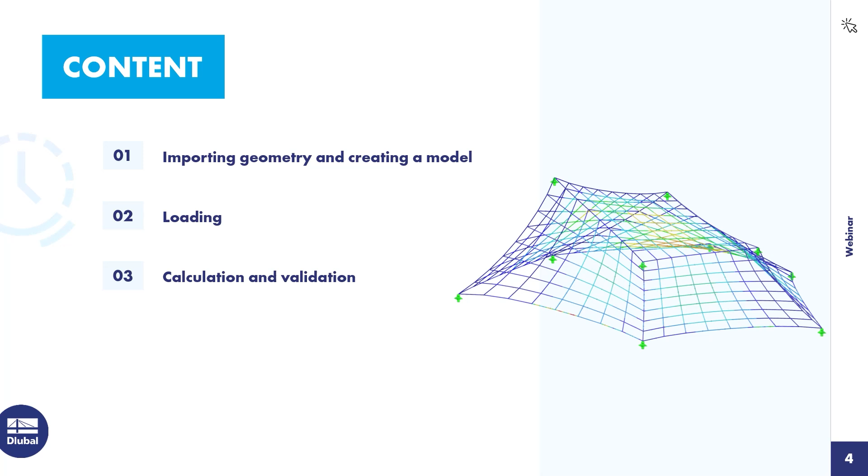I'll show you the principles with a simple cable net structure, and later we'll look at a more complex structure shown on the right. Imagine I'm a civil engineer and an architect comes to me and says: I designed this cable net structure, which is supposed to be a climbing frame for children, and I ask you to construct this. So your task is to find the right pre-stresses for this cable net structure so that the shape and geometry stays put and maintains the shape like the architect wants it to be, as he designed it. So this is the scope, let's go into the software and see how to do this.

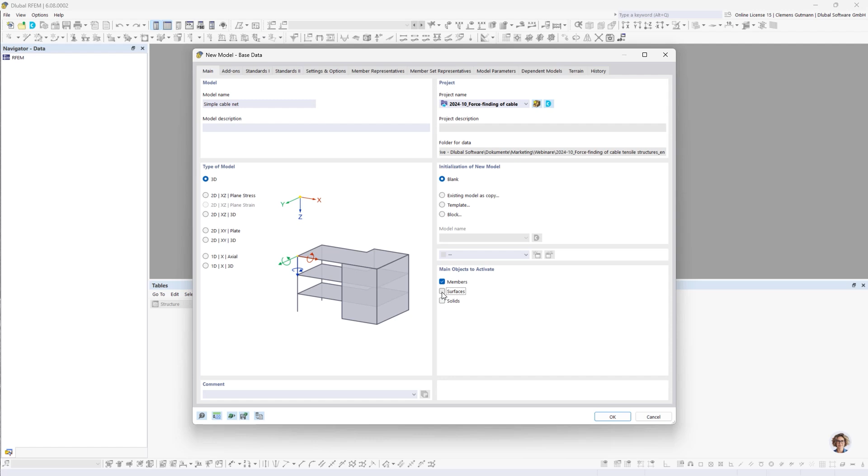First, we need to create a new model. I'm going to name it simple cable net. I'll deactivate surfaces and solids as I don't need them, and that way the data navigator becomes a little bit clearer.

Additionally, of course, we need the add-on form finding.

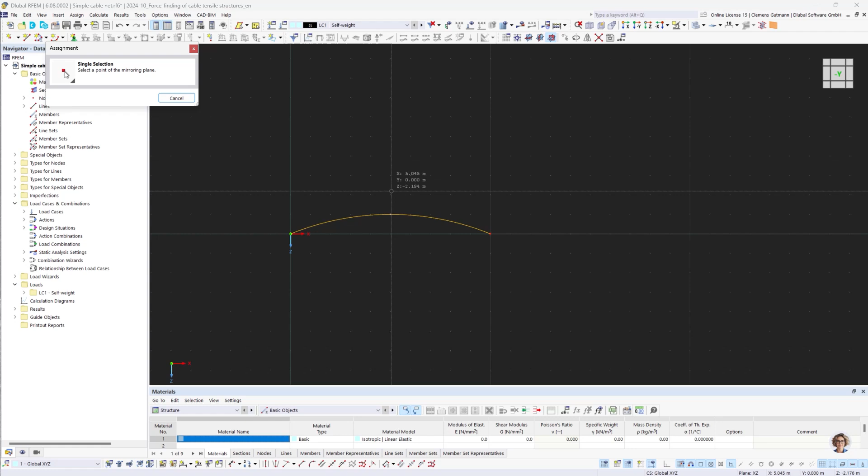We then proceed with the modeling. My simple cable net shall consist of an arch with a gauge of 1 meter and a width of 10 meters. I then want to mirror this about the XY plane and the center point one time. Sorry, made a mistake, forgot to check the copy option.

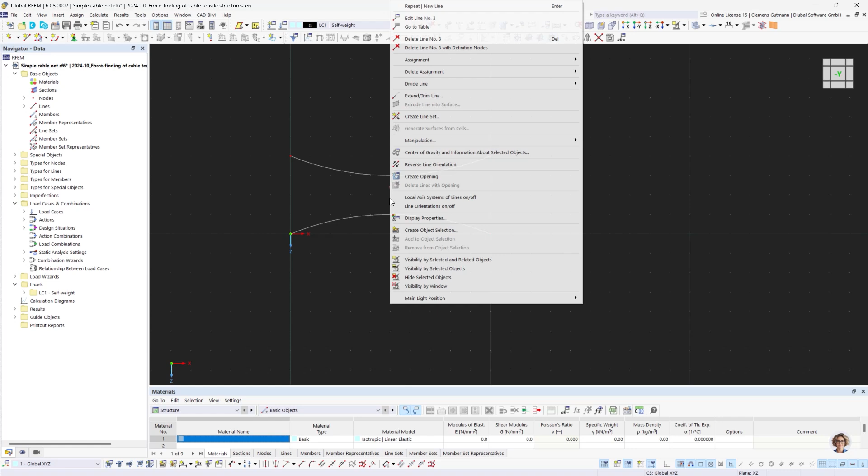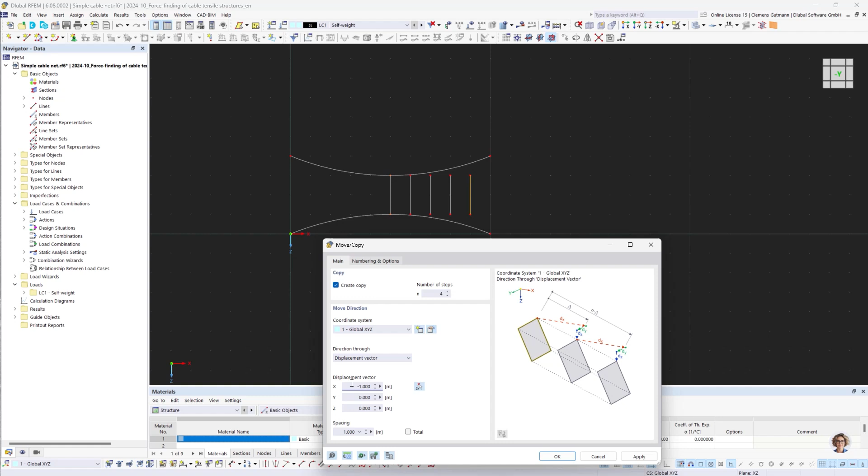These two arcs I want to connect by straight lines. And those straight lines I want to copy with a distance of 1 meter in either direction, so 1, 2, 3, 4 times. One meter, hit apply, and then again in the other direction.

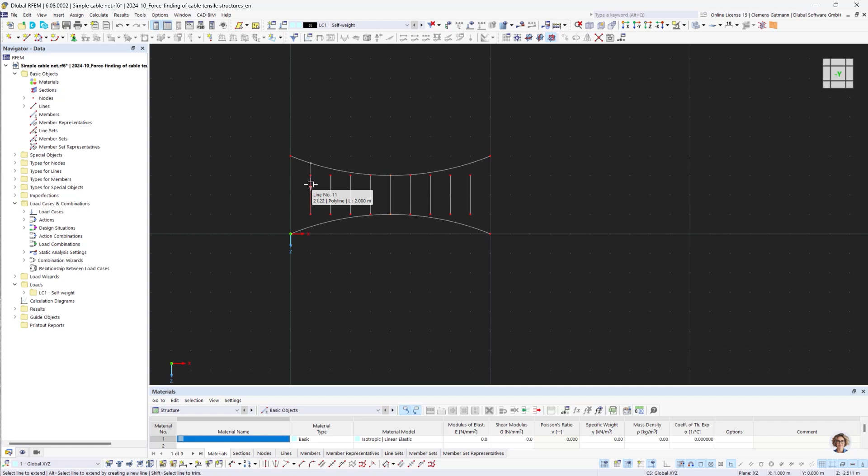I want to connect those straight lines now to the arches, and there's a quite handy way to do this: the extend graphically command, which hasn't been available too long in the software. There's the opposite command as well, trim graphically, which does the same but the other way around. If I click on it and hover over the end of a line, it automatically searches for other lines in that plane and creates a preview where an intersection has been found. If you click on it, the intersection is made and the line is extended to the other line. That way, complex intersections can be made quite easily and fast.

I want to connect all those lines, so I get small chunks between the straight lines, and I proceed with the material. I want to use a cable material from Fatzer today.

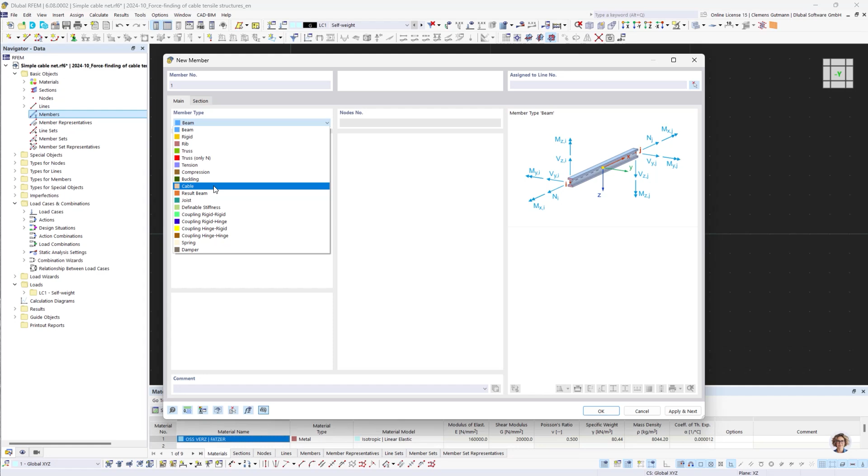Okay, and a section, a round bar section with 10 millimeters diameter. I then want to assign this section to all the lines I've created, and of course the member type is supposed to be cable. Select all lines. Okay. And okay. The colorful squares you see is an indicator that member representatives have been found.

This is quite a handy feature if you want to design a structure. So the software searches for members that have the same property and the same shape and groups them together in a so-called member representative. But since I do not want to perform a design today and every member is different, I deactivate this in the display navigator.

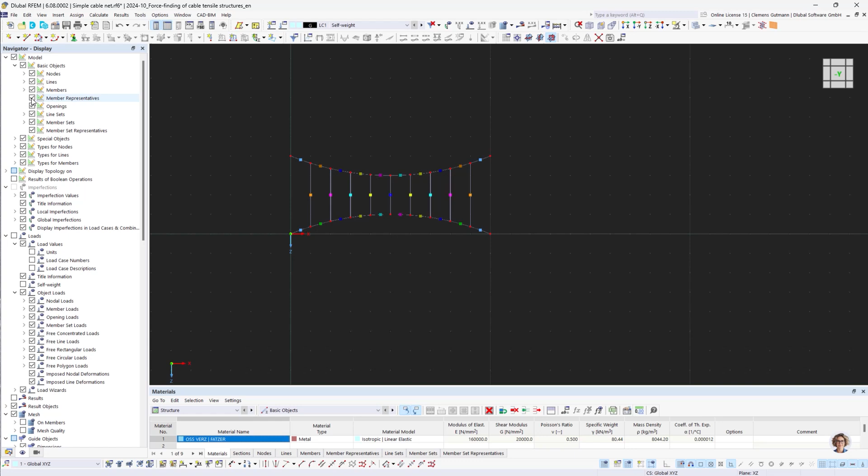Next step would be to assign a nodal support to the corners. Let's make them a little bit bigger.

Okay, and now we can define our load cases. Today I do not want to use the self-weight for this model, but just a pre-stress load case.

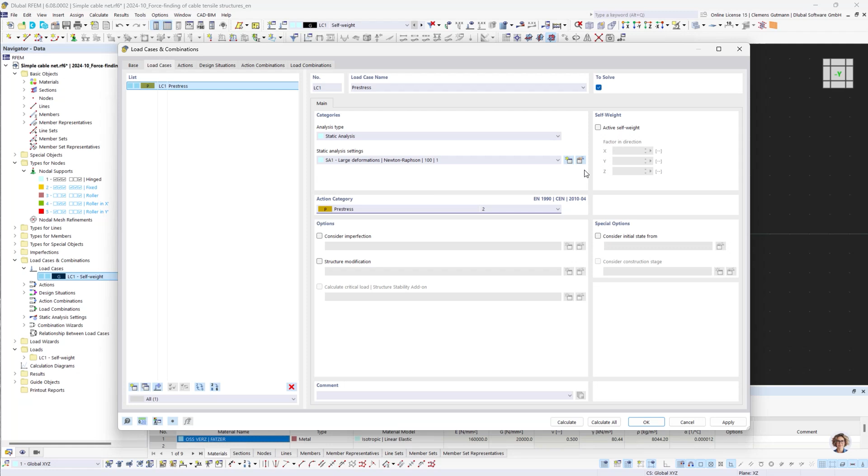And there's another setting that we have to adjust, and that is in the static analysis settings. So I'm going to edit those. And if you activate the form finding add-on, you get a new tab for the add-on here.

There are 3 options that I'm going to explain to you very quickly. The number of iterations for loading pre-stress determines how often the form finding solver tries to find a solution for the boundary conditions that you gave to him.

So if you define form finding loads, either force loads or geometry related loads, those are boundary conditions for the form finding solver, and he tries to find a solution that matches the boundary conditions the best.

Usually if you perform form finding, 15 is a good number, but since we want to do a force finding and we want to get a very exact result, I'm going to increase this number to 60. Depending on what model you want to force find, you have to try out yourself what number fits best. At a certain point, if you increase the number further, it will not result in a better result.

The second option is the speed of convergence. This is a setting where you can influence the stiffness of the members and the membranes. So this is especially interesting if you have structures with large deformations during the form finding process.

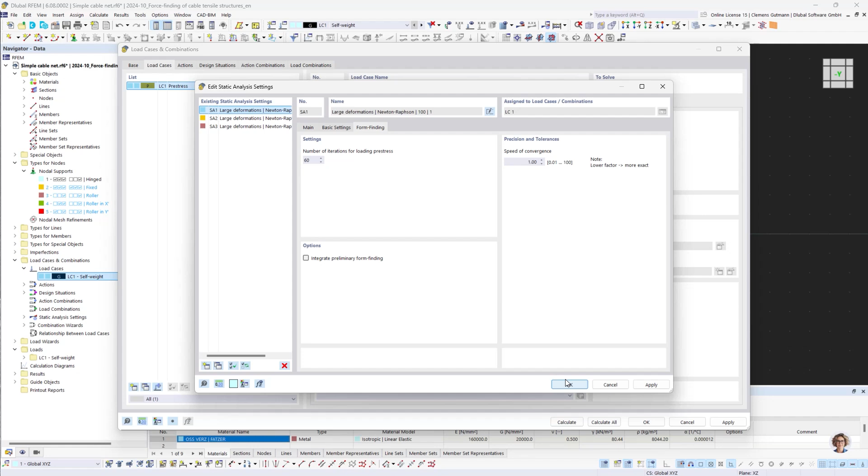Since we do not want any deformations, those last two options are not for us today, but I still wanted to explain them to you. We click OK, and again OK.

Now we can define our member loads, and for this I'm going to use the load type form finding, of course. At first I want to create an average force in member definition for the member in the center.

It's going to be 1 kilonewton, but as you may know, with form finding, it's actually irrelevant what size you pick. What matters is the ratio in the different directions. So you could also pick 10 or 0.1 or 5, whatever you like. It's just a reference for the form finding solver to find the pre-stress level.

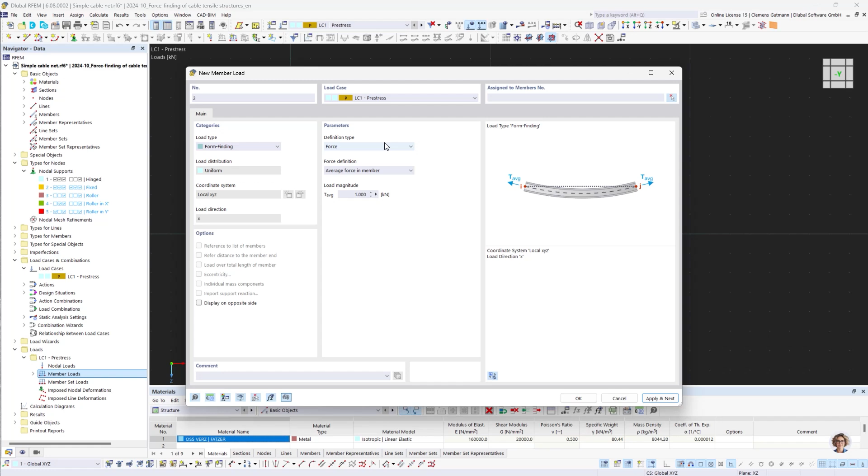Okay, we click apply and next. And to all other members, I want to assign a geometric form finding load with 100% length. So I want that all those members maintain their length. And I'm going to assign those to all other members. Okay, and okay.

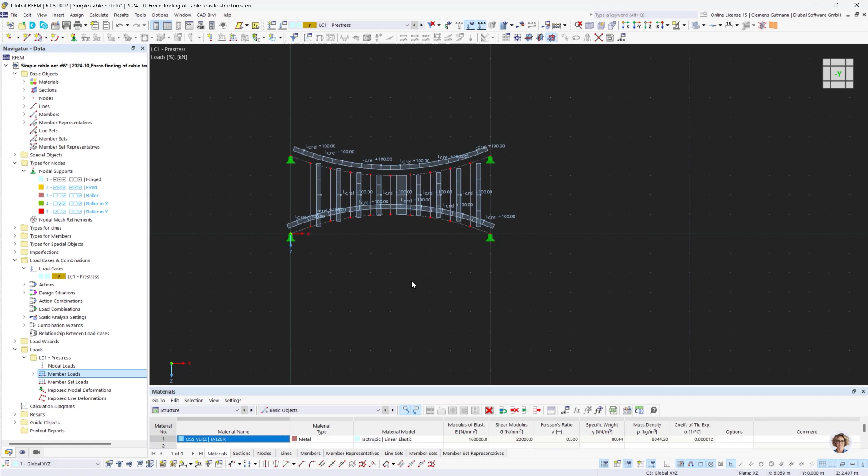Now we are ready to calculate this load case.

Let's have a look at the result. The result is not as good as I hoped, and there's a specific reason for this.

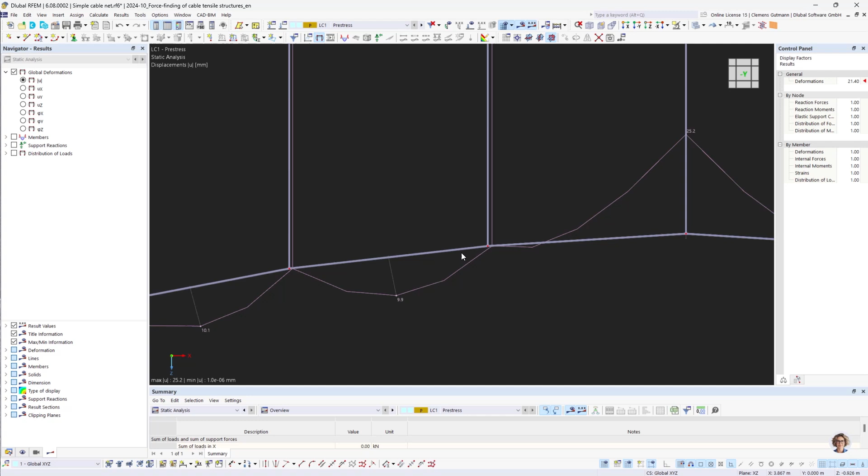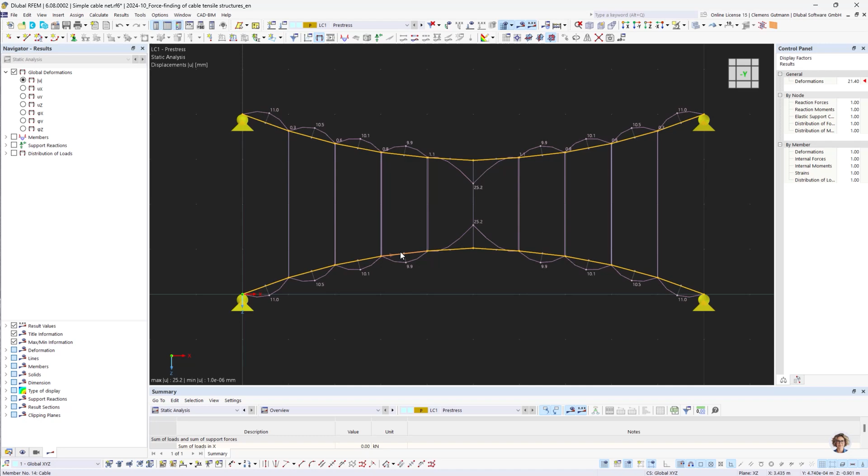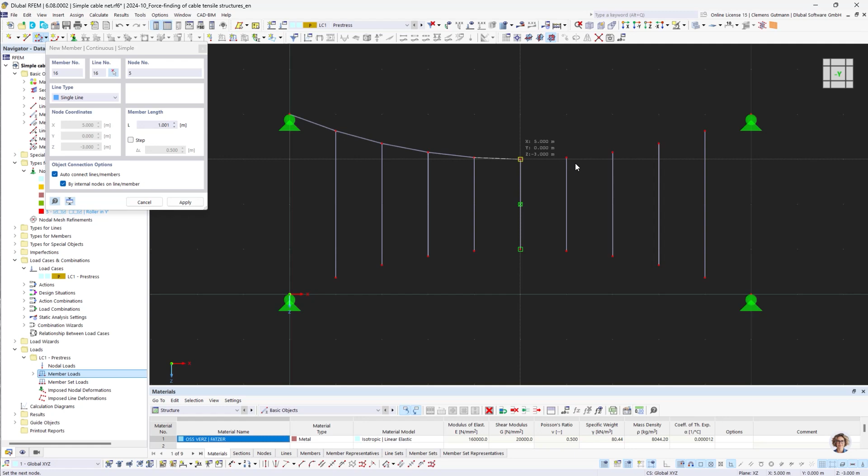To correct this, I'm going to delete those arches and connect the points with a straight member. I'll select continuous and tick all the nodes. And for the bottom, I'll mirror this again.

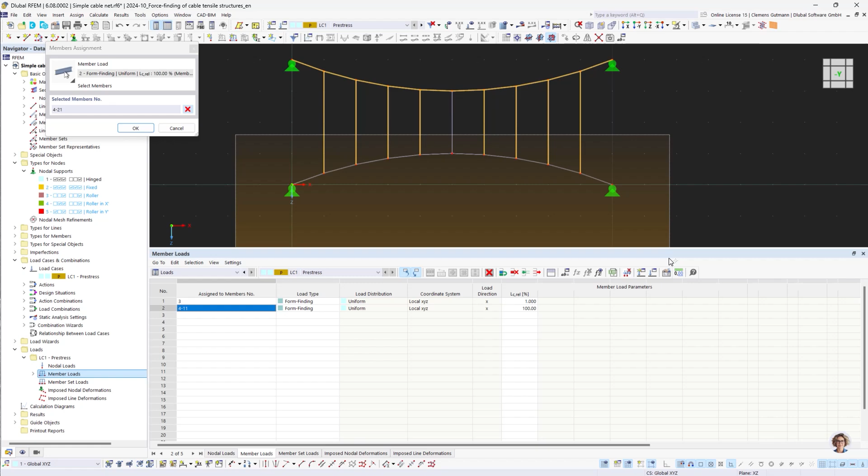Before we can calculate, I need to assign the loads again to the new members. Let's try this one more time.

Now we get the result that we've expected. There's almost no deformation, it's negligibly small, and we get a normal force layout that is reasonable. We have the 1 kilonewton in the middle, and like a hanging bridge, a bigger normal force in the arched cable members.

To show you that this is a real result and that the form finding solver did not imagine something, I want to validate this result.

In order to do that, I wrote myself a little Python script that reads the result data of load case 1. Then I filter the result data to get the internal normal force, and I want to assign those normal forces as an initial pre-stress to the members in load case number 2.

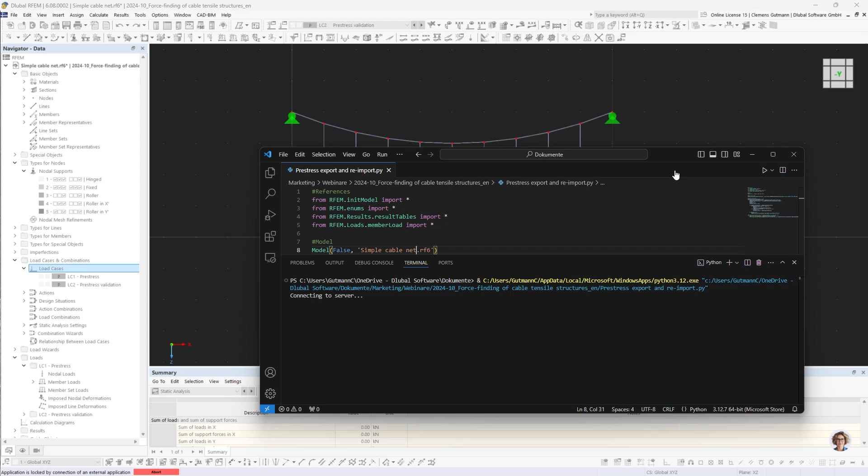This takes a short while. So now the script contacts RFEM, and we're going to see that the program is locked now through the script, performing the steps that I've explained. Now the software is unlocked again, and we can proceed with analyzing this model.

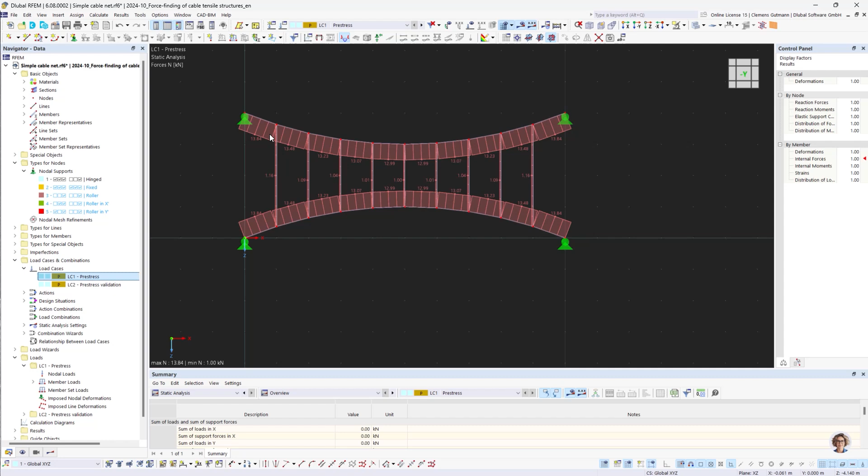Let's check whether the script has performed correctly. We have 13.84 here on the left and 12.99 in the middle. If we go to load case number 2 and look at the loads, we can see those same values on the left and in the middle. So that worked out.

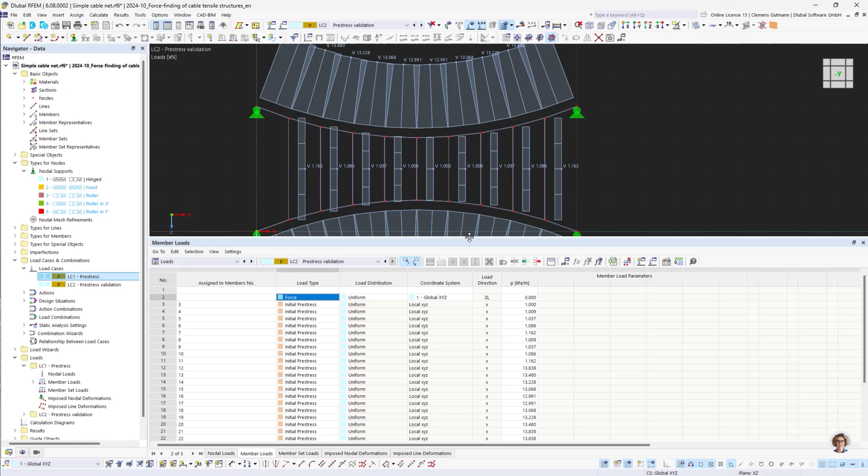These loads, as I said, are of type initial pre-stress. This is a member load, not a form finding load. It's a member load, and it's the initial pre-stress for the member. We're going to see whether this initial pre-stress is also going to be the final pre-stress of the member by calculating this load case.

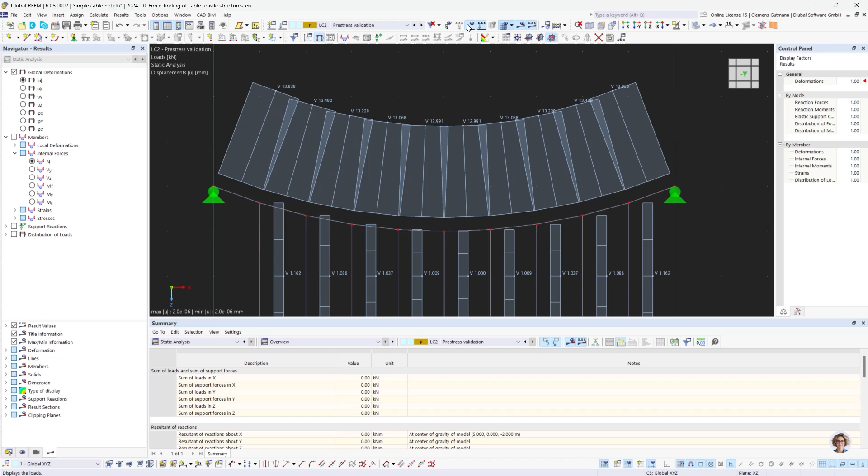As we can see, the result is very, very nice. We get as a final result the same as what we put in as a load. We can look at the global deformations, and those are even smaller than before. So the form finding solver found a valid and good solution for the boundary conditions that we gave it. There are no global deformations, and we found the force needed as a pre-stress for the structure in order to maintain its shape.

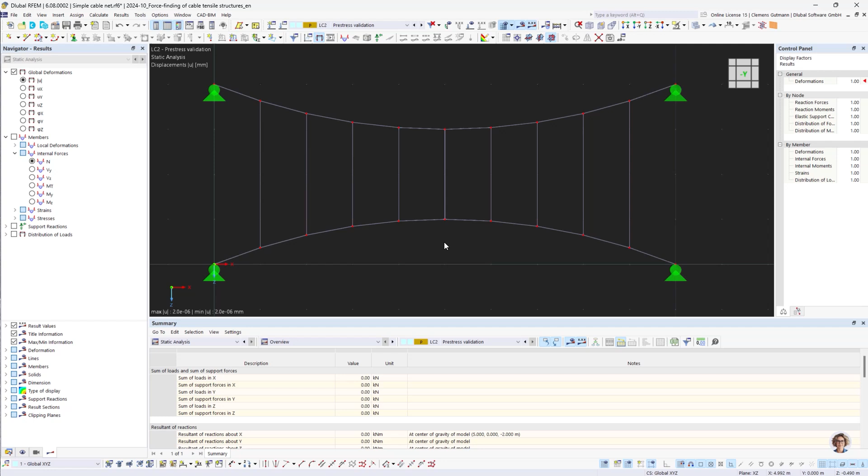We want to proceed now to the more complex structure, and therefore we are going to create a new model. I'm going to name this climbing frame.

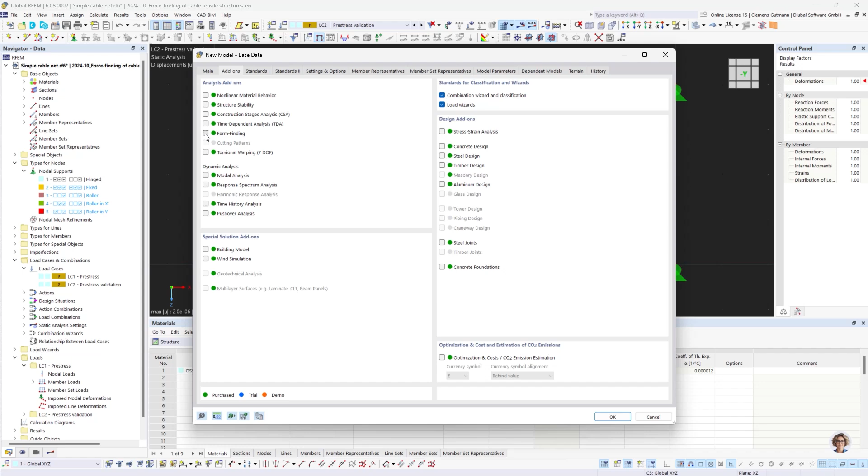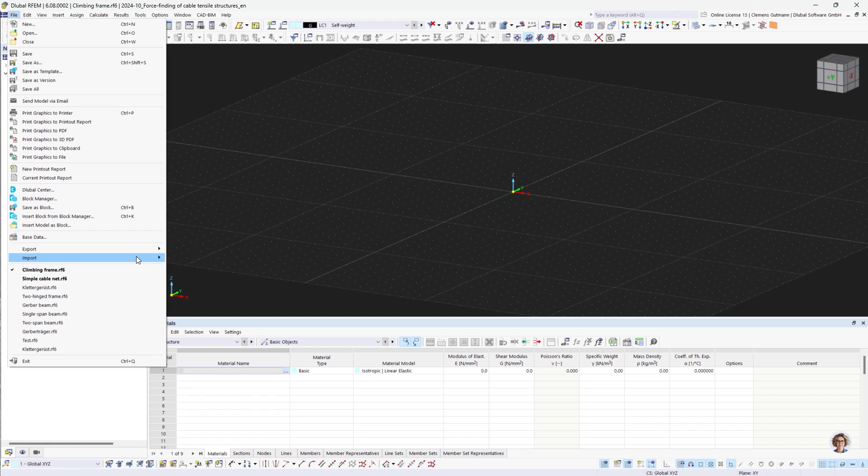Again, we need the add-on form finding. Since I want to import a DXF file that I got from my architect, I want to flip the global axis, because usually drawings have the z-axis pointing upwards. Now I can go to File, Import DXF, and import the DXF file that I got from the architect.

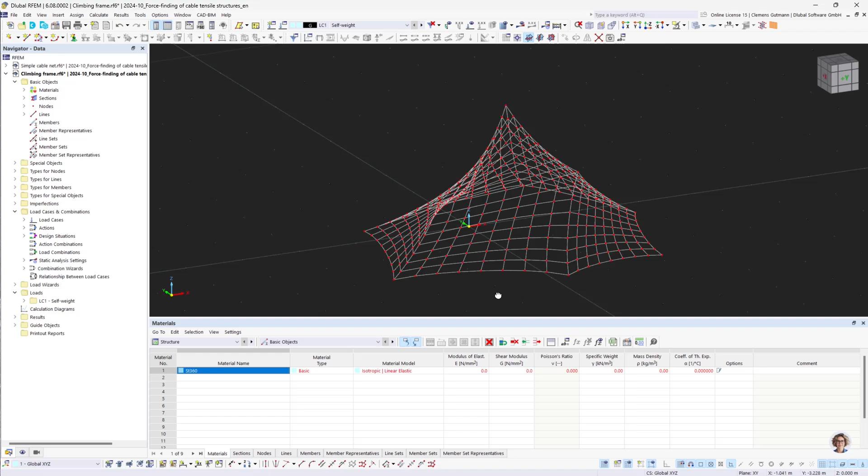The import has been successfully performed. As you can see, the structure, the geometry is a lot more complex. Let's check whether it is correctly drawn with a quick model check: identical nodes, none, and overlapping lines, none. That's good.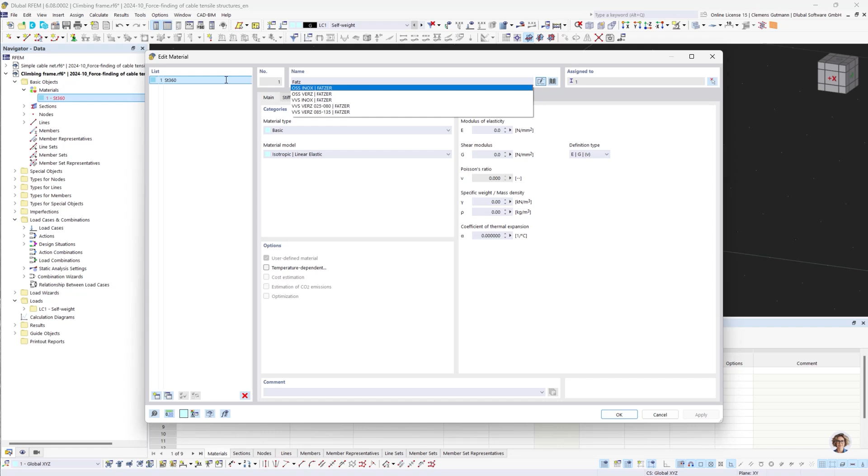Now we can proceed with the material. I want to use the same materials as before, so this cable material, and the round section material with a diameter of 10 millimeters.

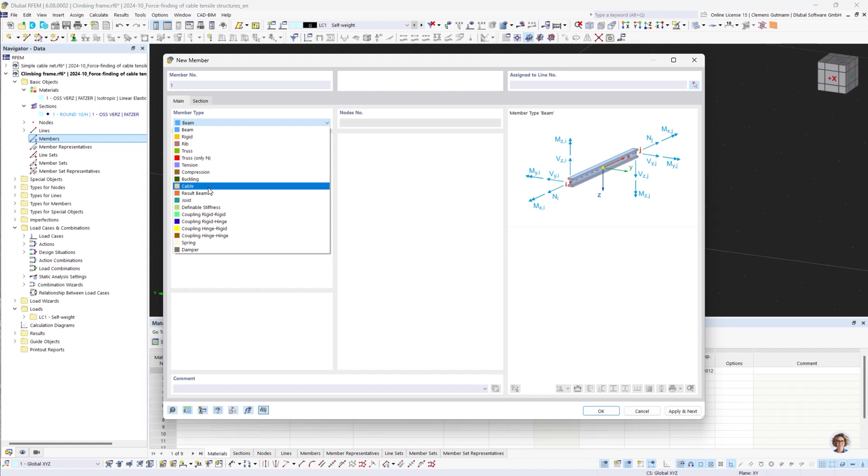New member, again cable, and assign this to every line individually. This is even more colorful with the member representatives, so I'm going to deactivate those again, as I don't need them here either.

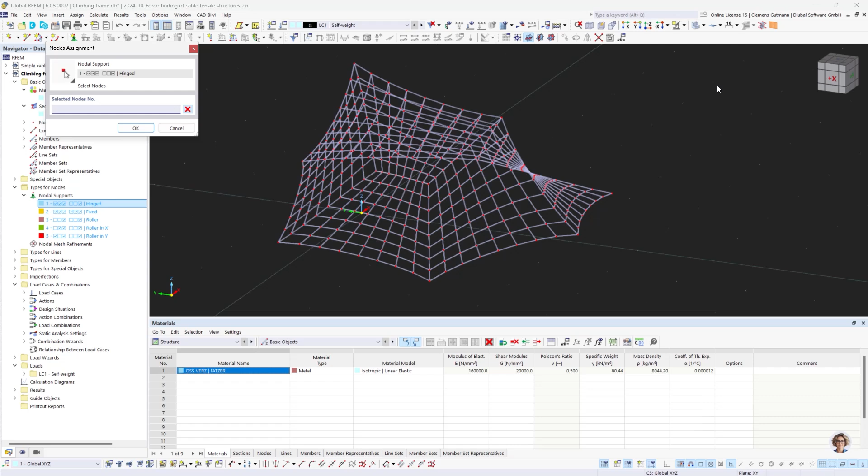Next step would again be the support. The substructure usually consists of some columns, like a circular section. I do not want to model that today, so I'm just going to hold all the corner points.

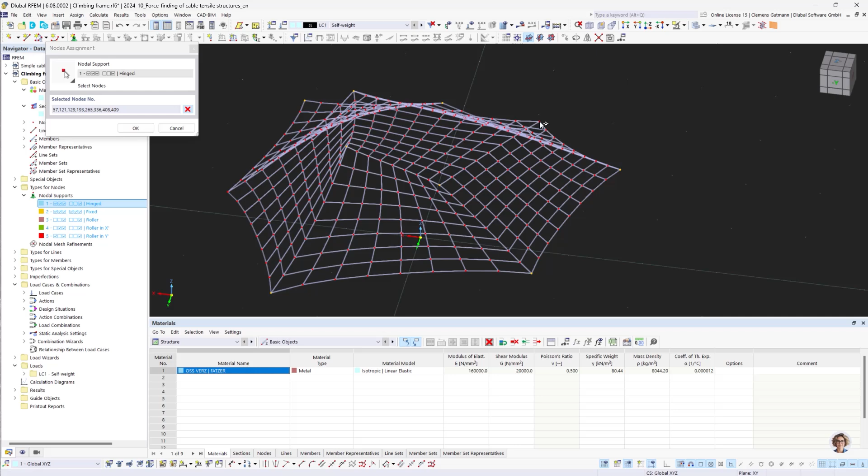Okay. And okay. Looks good.

For the pre-stress load later on, I want to parametrize this to show you the influence of the pre-stress level. So I'm going to define a new global parameter, and I'm going to name this pre-stress level. This is going to be a float value, and let's start with 0.1, or 10%.

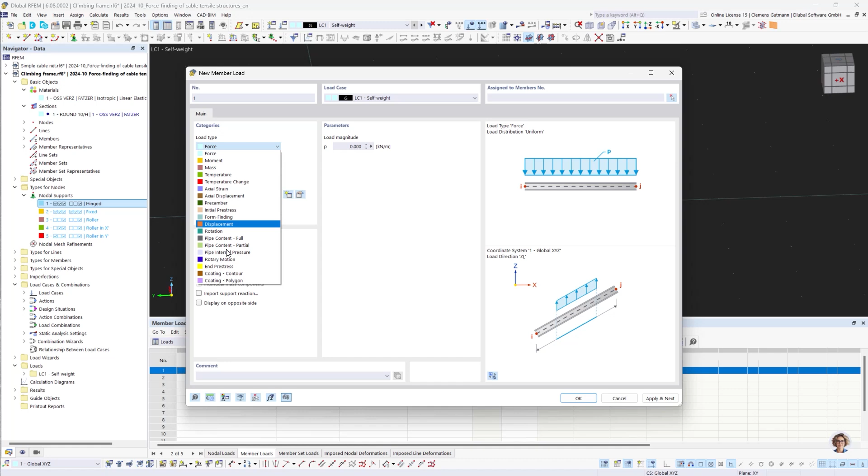Hit OK, and create some loads. I want to assign one form finding load of type force with now a parametrized force. So I'm clicking on that right arrow here and selecting the option Edit Formula.

I want the pre-stress level variable that I've just defined, times the section area of the cable. So I'm typing in sections, and my cable has the section number 1, and I want the area of this, and I want to multiply this with the yield strength of the cable, which is usually 1770.

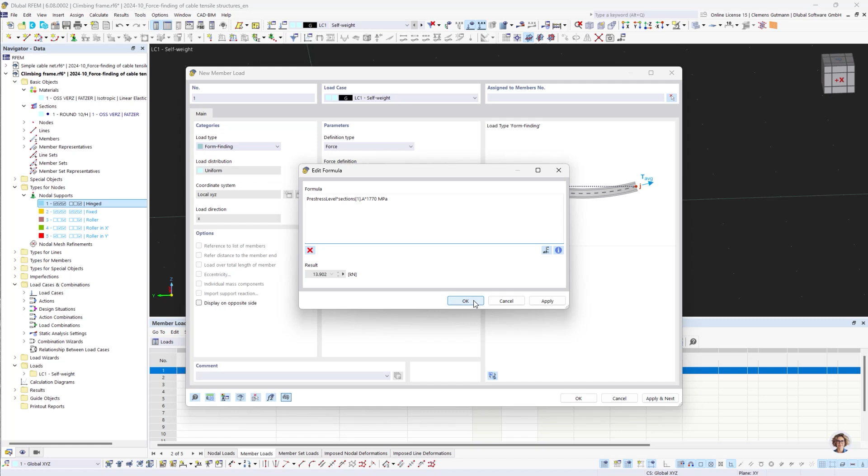MPa. Usually the formula editor reads SI units - newtons, meters, kilograms, and so on - but you can tell it that it's another unit by just typing MPa, and now it calculates the value accordingly. We click OK, and now we have a yellow triangle in the top left corner, and this indicates that this value is a result of a formula calculation.

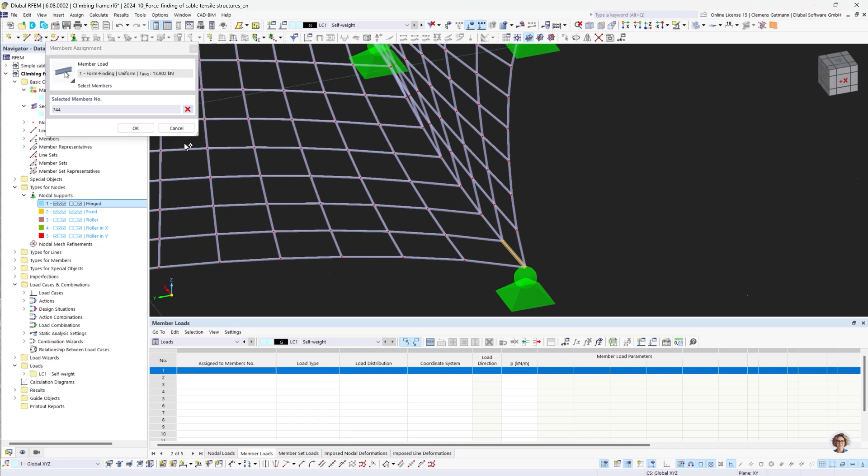I want to assign this to a member that I know is going to be under a lot of pre-stress, and I assume those are going to be the edge cables. So I'm going to pick this one right beside the support. Apply, next.

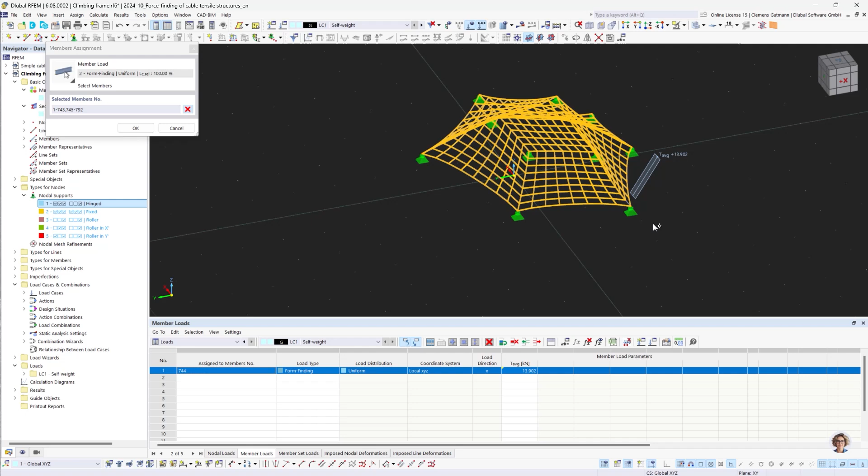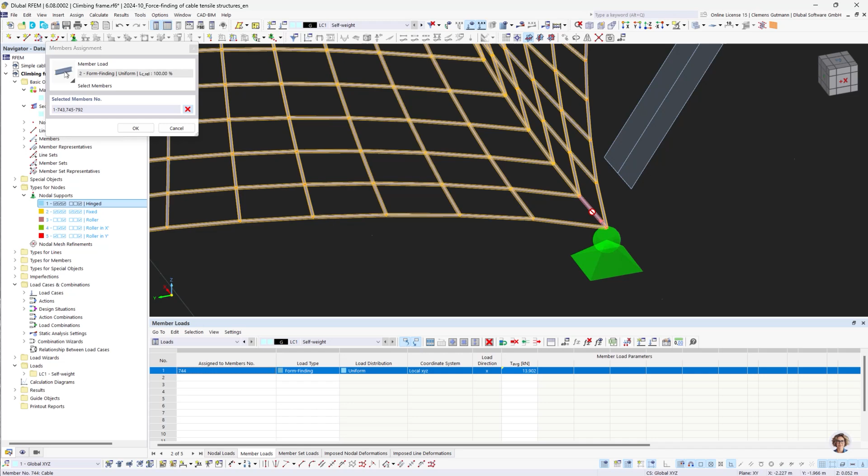I want to assign to all other members again the geometric definition type of 100%. Select all. Notice that although I selected also this one member, it's not selecting it, because you can only define one form finding load to a member - there cannot be two boundary conditions for the form finding solver for the same element. So this is why. Click OK, and OK.

Good. Now let's go to the load cases and combinations. I again only want to use a pre-stress for now and deactivate the self-weight, and make some changes to the static analysis settings.

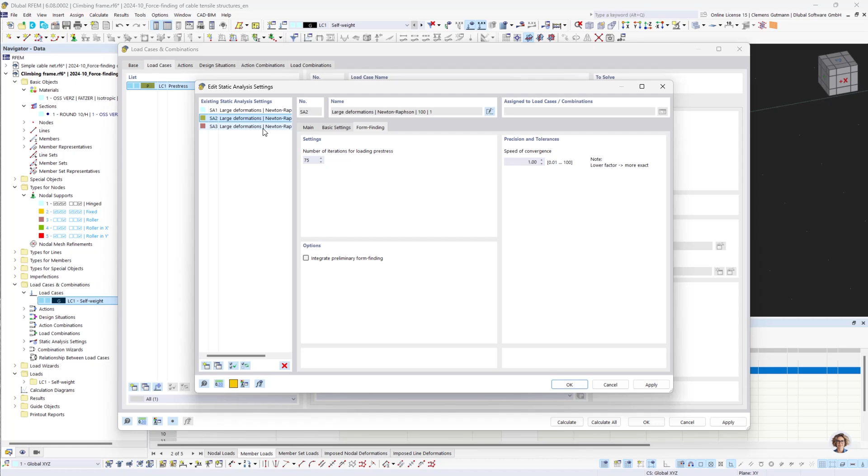Now I want to show you what the influence of this form finding iteration number is on the result. For the first calculation, I'll leave it at 15. Then I want a second analysis setting with 75, and then 150.

And we'll take a look at what affects the result. Let's calculate everything.

Let's have a look at the results. So we have, not that large, but still significant deformations of almost 20 millimeters. This is due to the fact that the number of iterations is set too low.

Let's try again and assign the second option with 75 iterations, and calculate the load case again. Now we can see that the result has gotten a lot better.

We have an almost negligible size of the deformation, and let's try one higher number with 150. So let's remember the 1.8. Calculate this again.

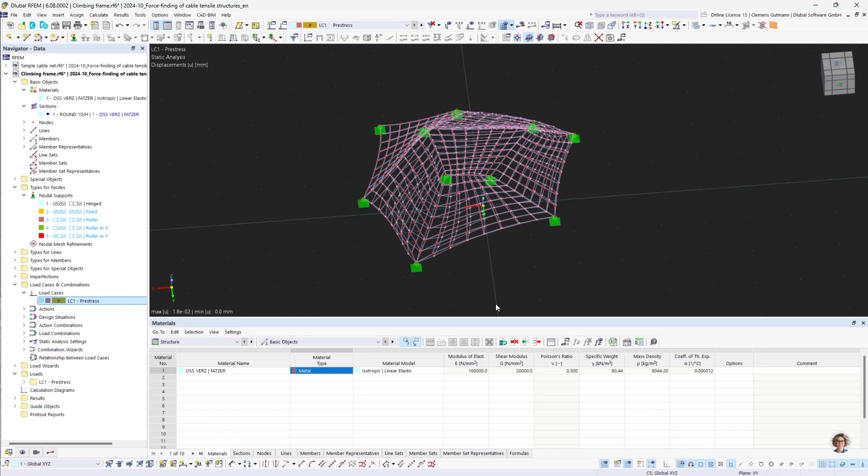As you can see, the result got a little bit better, like one decimal place roughly. You have to think for yourself if this improvement is necessary. For me, I think the number of 75 is sufficient, and we can save some time if we limit the number of iterations for the form finding solver here.

Good, so let's calculate the results again. Did not save that. Okay.

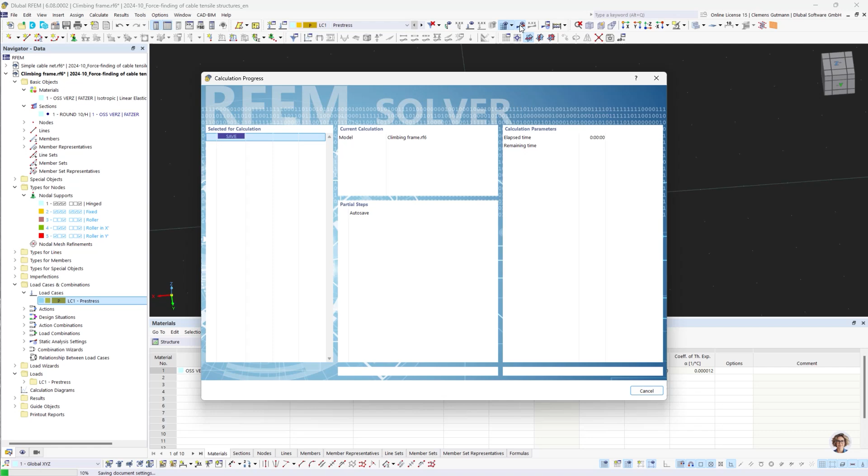Another thing that I wanted to show you was the influence of the pre-stress. So if you take a look at the normal internal forces, we have here the 13.9 that we predefined earlier.

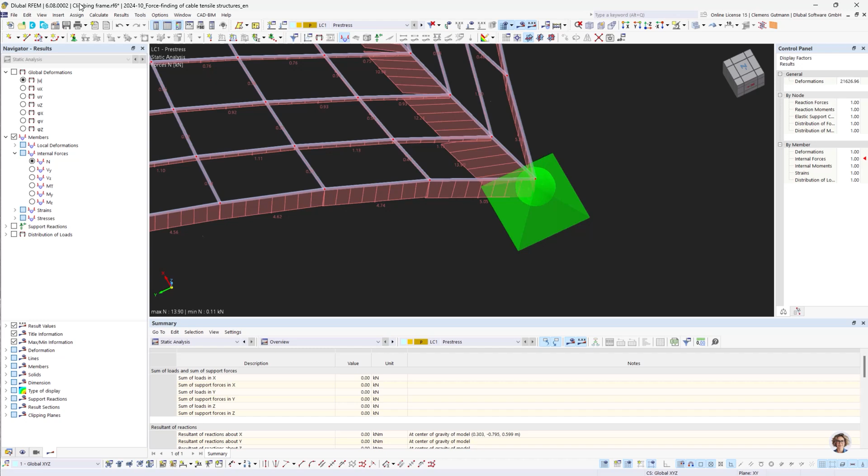And I'm going to change now the global parameter to 500% and click OK. Let's calculate again.

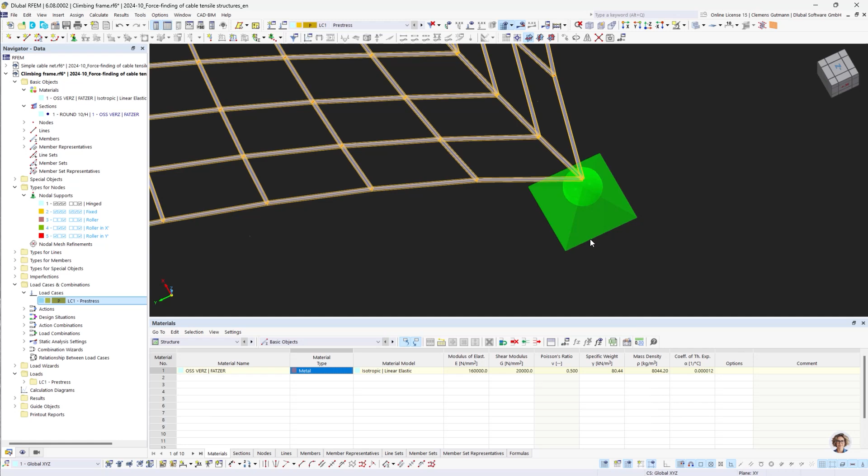As you can see, of course, the number has increased, but it is still the predefined value of 69.51. And if we take a look at the global deformations, the value of the global deformations is lower than before.

That is due to the fact that a higher pre-stress yields a higher stiffness of the geometry, but as you can see, the influence is not significant.

With this model, I also want to show you the validation of the result. But since this model has more members, it takes some time for the results to be transferred into the new load case 2, like before. So I prepared another model where we already have those results, and I'm going to open this now.

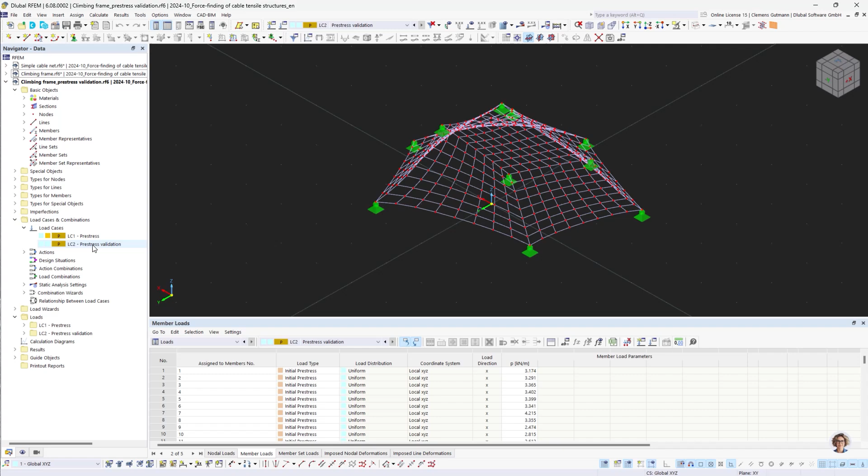So let's have a look. I have created a new load case number 2, like before, and the initial pre-stress loads are the same as the results of load case number 1.

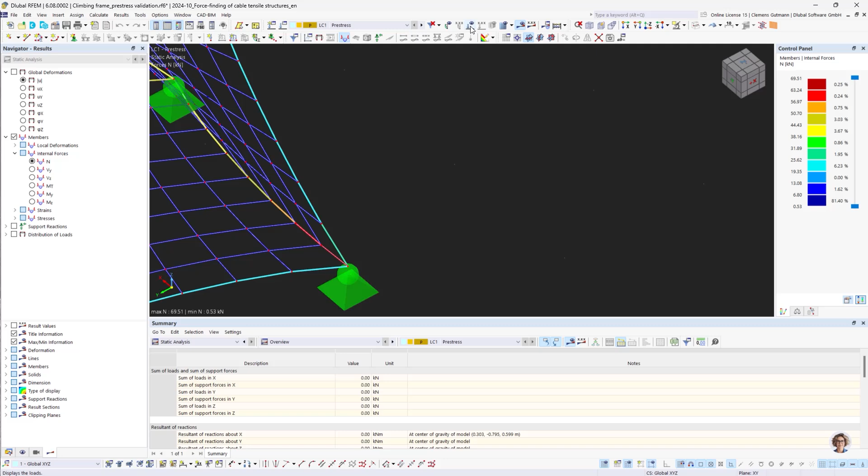So we have the 69.51 in load case number 2, and this is the result of load case number 1. So the result values here are the same. Let's calculate this and see whether the deformation changes or whether it stays the same.

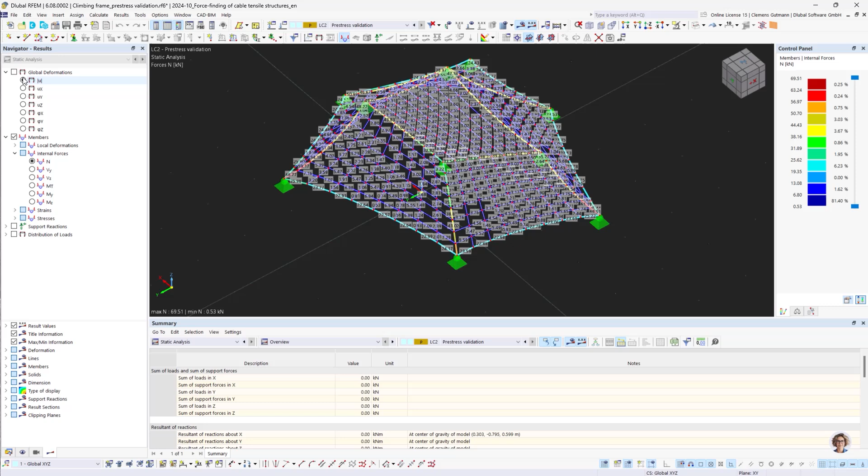And as we can see, the deformation is good, it's neglectably small. So again, the form finding solver also found a valid and good solution for the given boundary conditions for this complex structure.

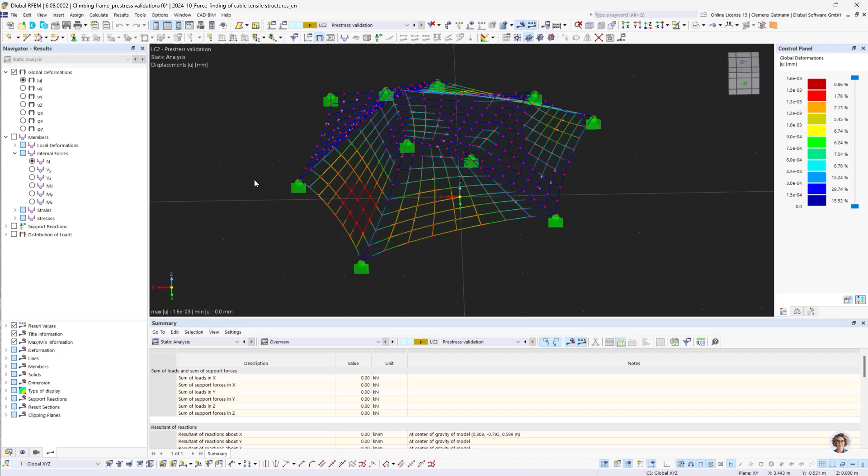Let's go back into our original model. I said that I deactivated the self weight, and I want to show you what effects derive from activating this option.

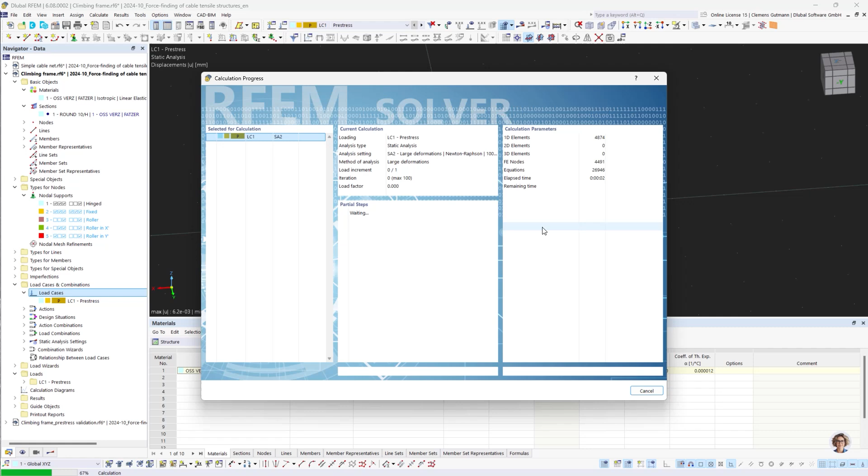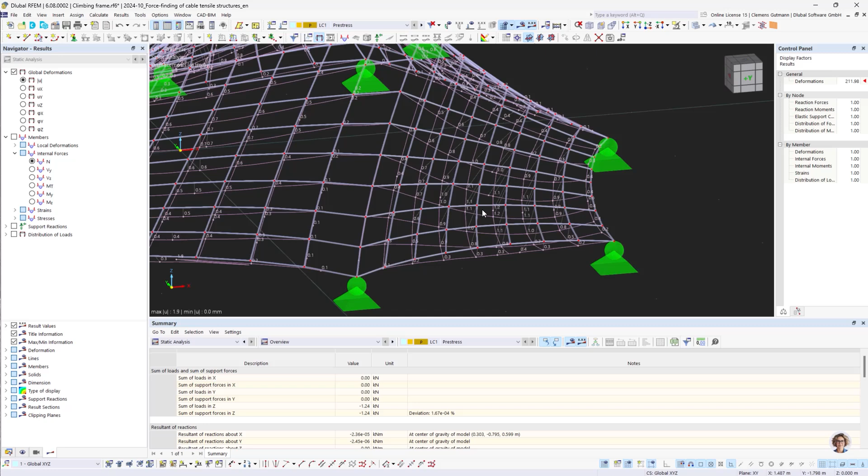Calculate. And like I said before, you are bound to the rules and laws of form finding. So because we have in some places a very small stiffness in the global Z direction, there are some notable deformations, in terms of civil engineering still quite small with less than 2 millimeters, but there are limitations, of course, physical limitations to the form finding method. Still, I think this is a good result, a practical result.

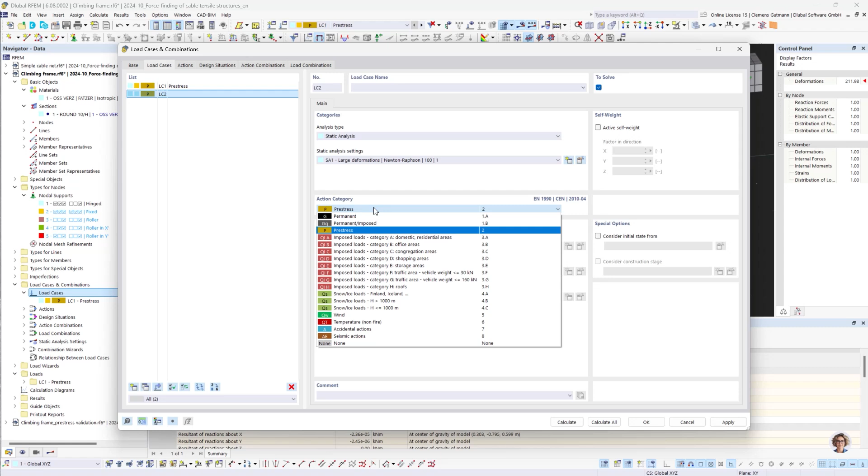Let's see how the structure reacts to a child load. Usually you have a man load, but since this is a climbing frame, I'll apply a child load to this. And I want to consider the pre-stress load case as initial state for the calculation of this load case.

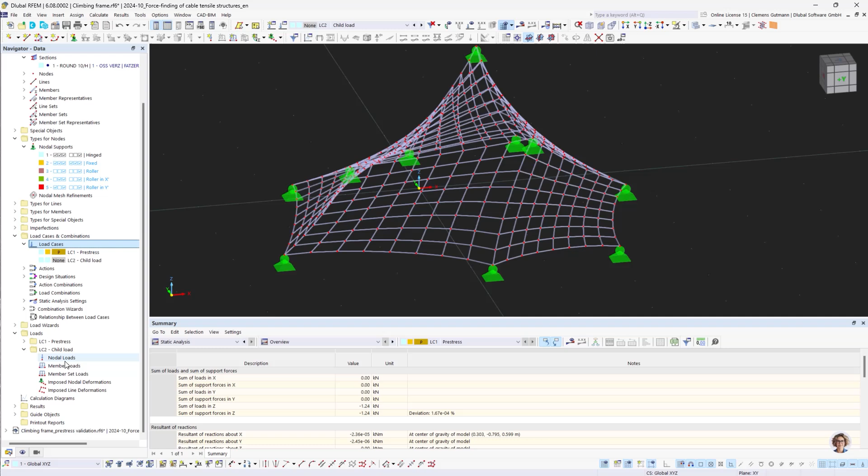Let's apply some node loads of maybe 0.5 kilonewtons to some nodes here in the model. So maybe a child is up here, and maybe another one down here, and over here, and maybe over here.

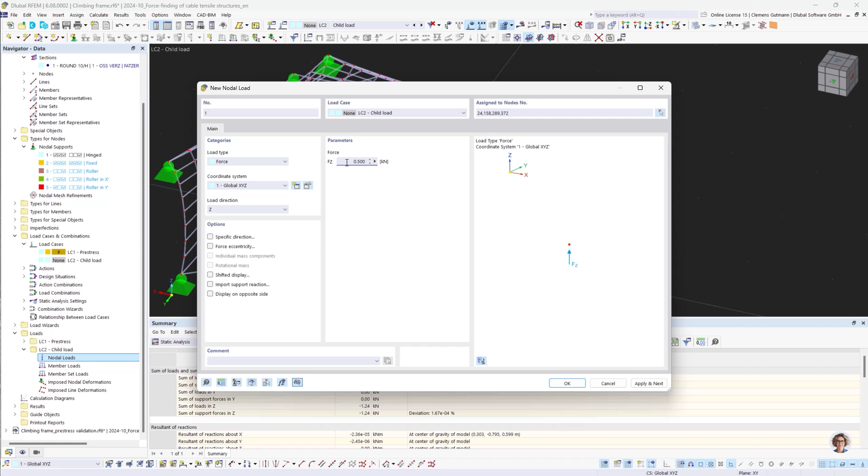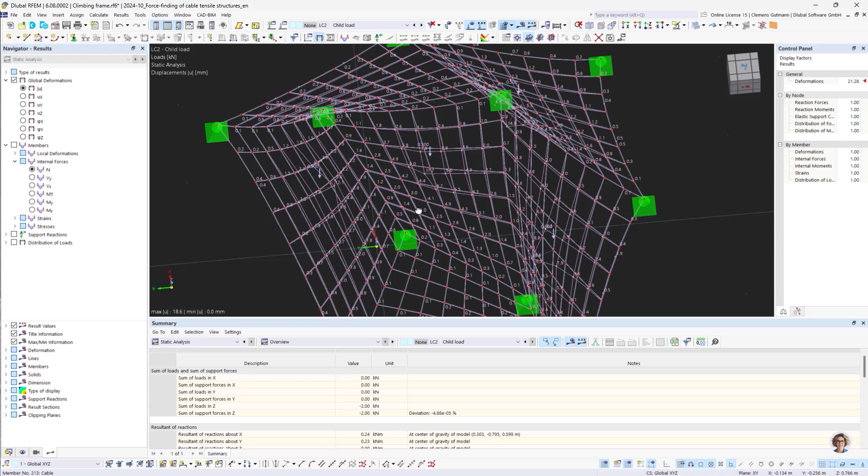Let's check out the results for this. And as expected, the deformations get higher, and this is due to the stiffness of the cable net in that direction. But still, I think with less than 20 millimeters, the deformations are neglectably small.

But let's see what the level of pre-stress has, which effect the level of pre-stress has on the results. So let's go back to only 10% pre-stress level and see which deformations we get now.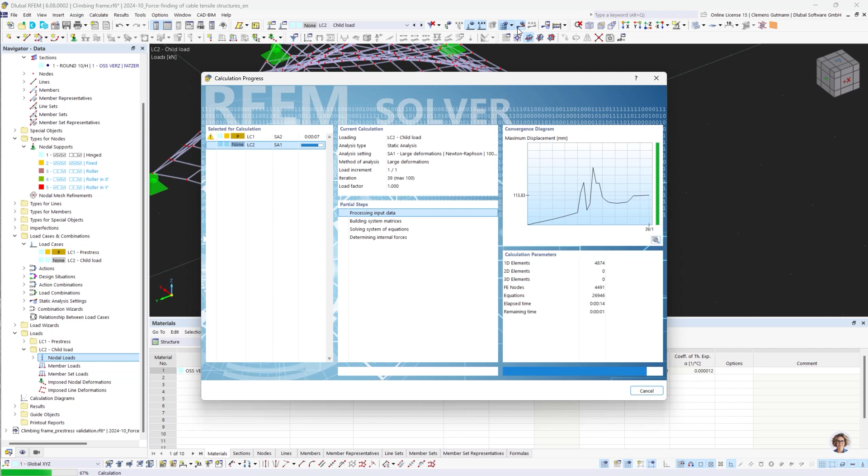Okay, we got an error. That is due to the fact that the number of iterations for the calculation is set too low for this model. So let's try again with a higher number of iterations, so the solver has some more time to find a solution.

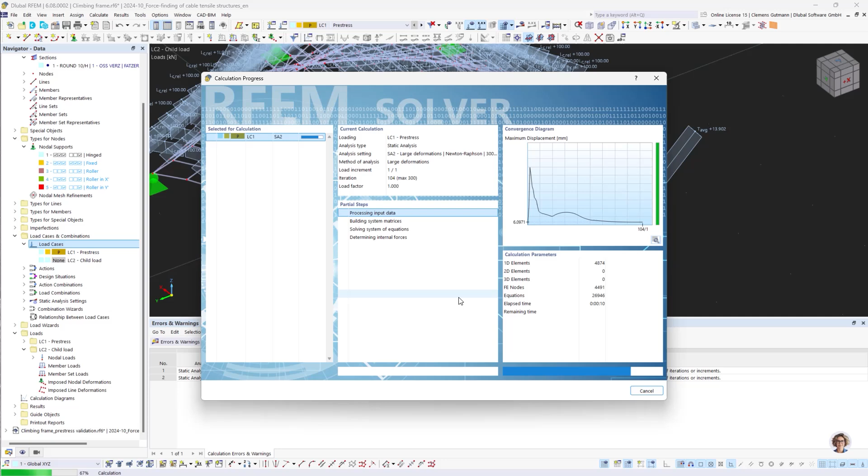Okay, just a little bit more than 100. It didn't calculate the second one. Let's do this again.

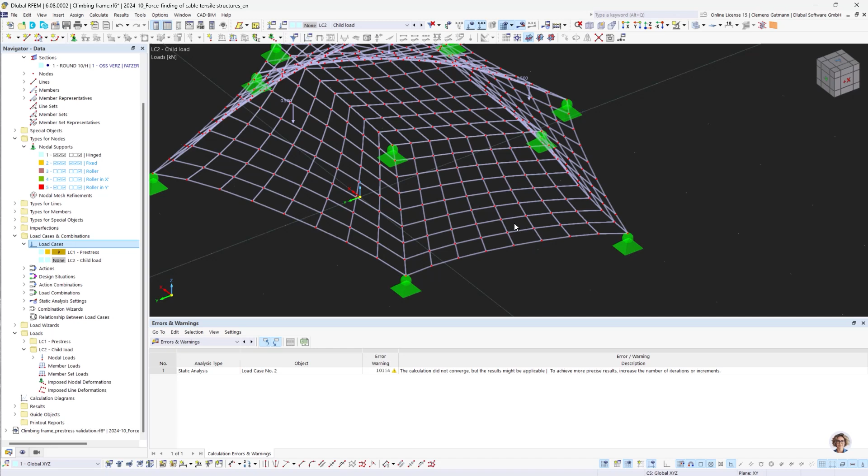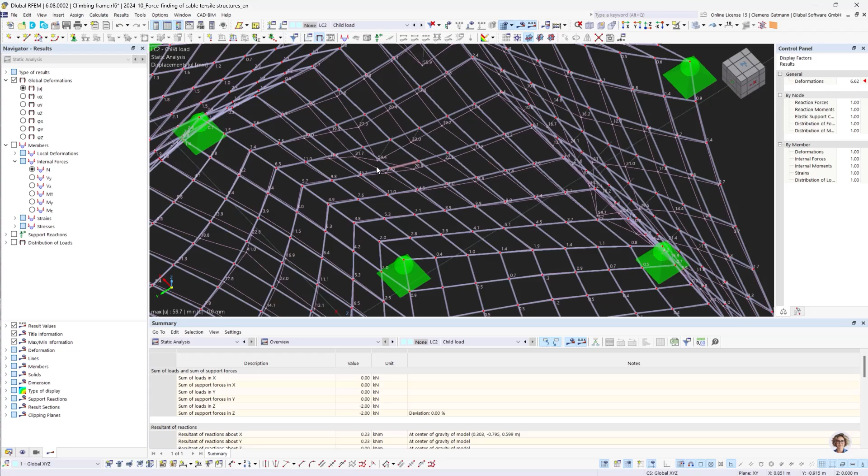So for the pre-stress level, we have the expected results, or closely. And for the deformations with the child load, we can see that the deformations have gotten significantly larger, with almost 60 millimeters now. Still, I think that's okay, but of course there's an influence of the pre-stress level later on—not for the form finding, but if you use the form found and pre-stressed structure for additional loads, it makes a difference what pre-stress level you have applied to the model.

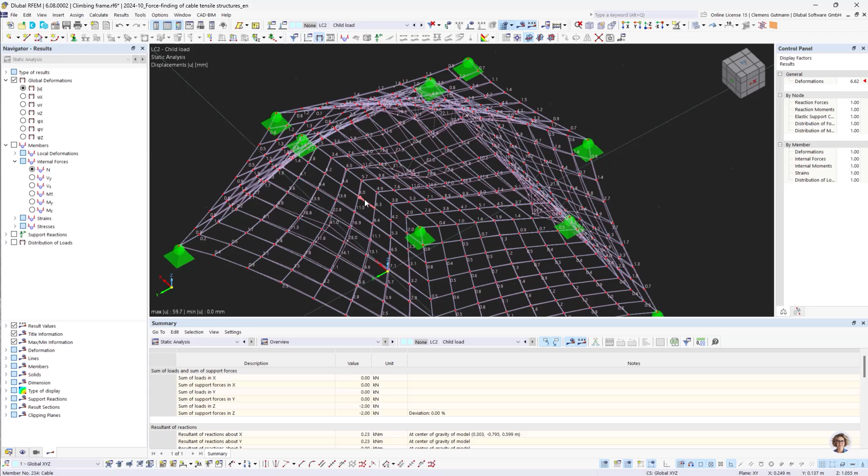And this is all I wanted to show you today, and thanks for watching, and I'll give back to Andreas now. Thank you.